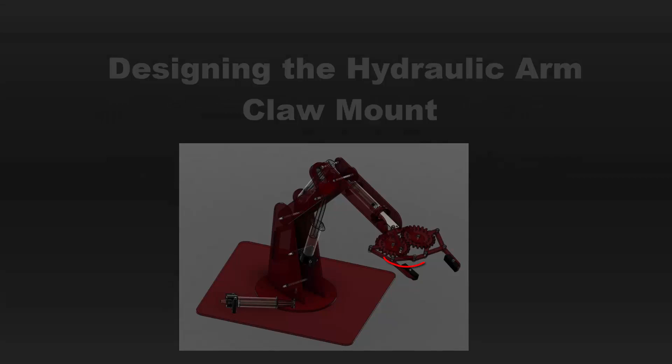Hey everyone, welcome back. In this video tutorial, I'm going to show you how to design the claw mount piece seen right here. This piece is important because it serves as the foundation for all of our other claw pieces. So let's get started.

Come on up to File and let's do a new design. We're going to start a sketch here on our XY plane.

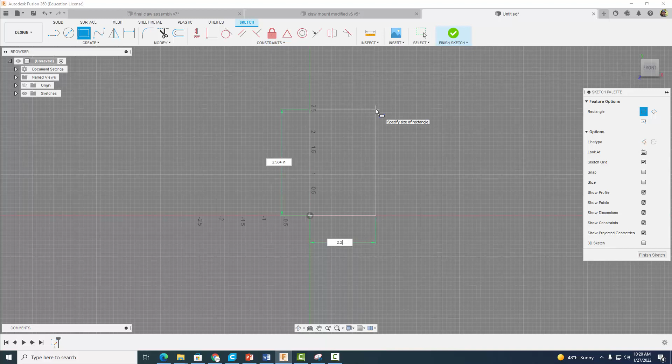The first thing we're going to do is create a rectangle with the following dimensions. We want its width to be 2.25. I'm going to hit the tab button, and we want its height to be 2.819. Enter. Okay, and then we're going to add some chamfers here.

I'm going to modify chamfer, and we want to select equal distance chamfer. I'm going to select right there, and I want that distance to be 0.625. I'll put another one with the same distance, 0.625, then hit enter. So we have our two chamfers looking good.

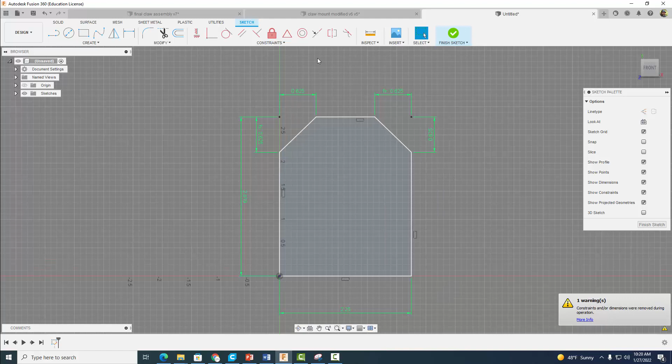The next thing we want to do is come over to our offset tool, and we're going to offset this a distance of minus 0.25 inches. Hit enter.

Now we're going to create two small holes for our M3 bolts, with diameters of 0.11. I'm going to dimension this so it is 0.125 from this edge, and from this edge down here we want it to be 1.189 inches.

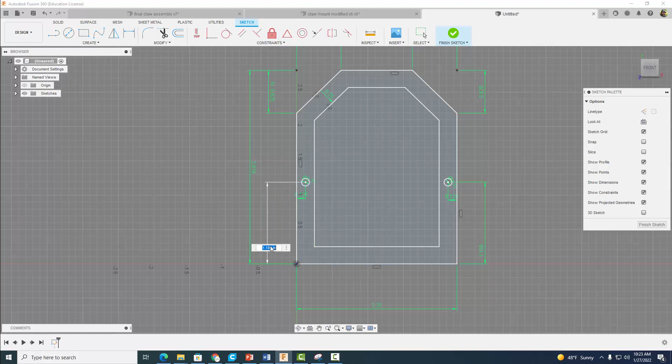I'm going to do basically the same thing for another hole on the opposite side. Grab the circle tool, drag out a circle with 0.11 inches in diameter, and dimension it so it is 0.125 inches from that edge. If we did it right, this should be 1.189 inches there. Yep, we're good.

Now I'm going to grab my circle tool again, go to the center, and drag out another circle with a diameter of 0.9 inches. I'll do that on the other side as well, 0.9 inches. Then I'm going to go ahead and trim some stuff up here.

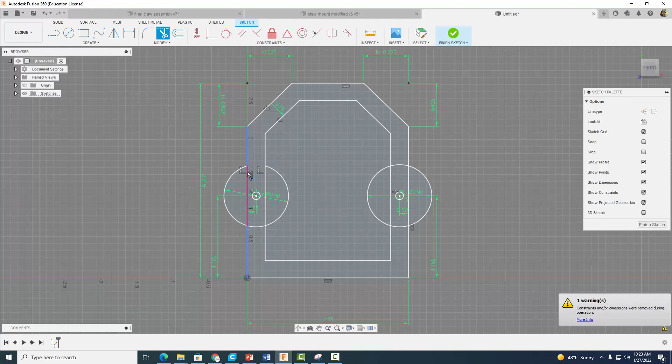Be careful because you can mess this up. I'm going to trim all the inside stuff basically - this guy, this guy, this guy, and this guy. So we have something that looks like that.

Now we've got to create two more holes for two more M3 bolts, and we're going to do them right up here. They're going to be the same diameter, 0.11 inches. I'll make one more over here, 0.11 inches, and then let's dimension them.

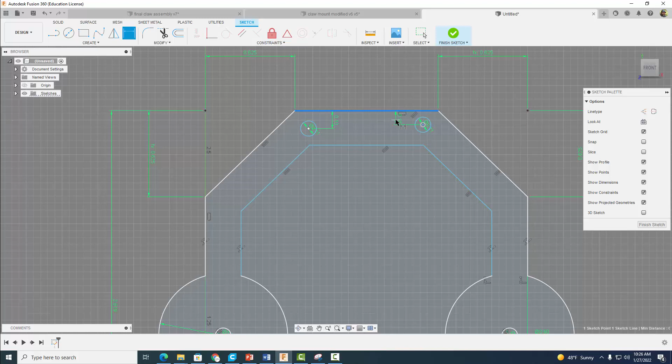From here to here, we want this distance to be 0.13, and from here to here, 0.13 as well. Then from here to here, that edge, we want that distance to be 0.695. Let's do the same thing over here so we're consistent - 0.695. Enter. Looking good, so we have four holes for our M3 bolts.

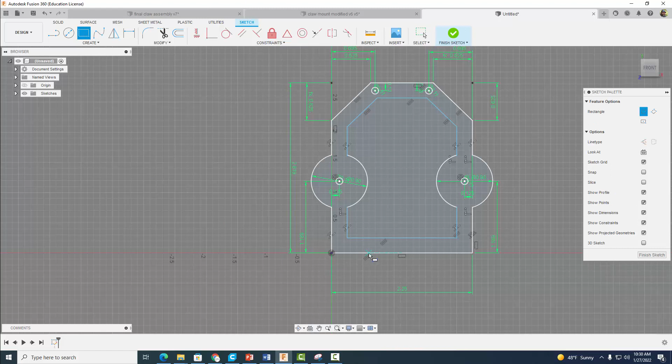Now we're going to drag out a square here, right in this vicinity, and dimension it. From this edge to this edge, we want it to be 0.5 inches. Then we want this distance to be 1 inch, and this distance from here to here to be 1.25 inches.

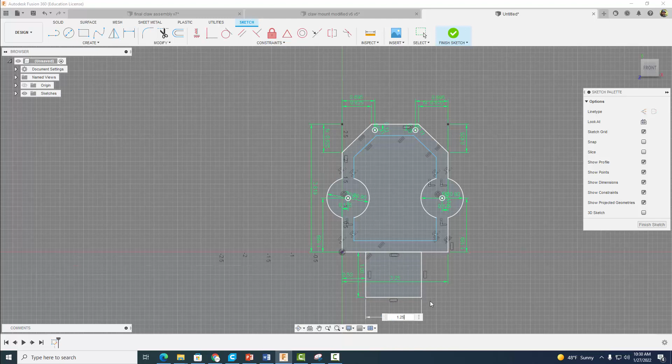I'm going to offset it a distance of 0.2 inches. Then let's zoom in here so you guys can see. We're going to make four squares and dimension them so that each side is 0.125 inches, or 1/8 of an inch.

0.125, enter. So we're going to do that all the way around - a square here, a square here, a square here, and a square there. I'm going to keep going around, 0.125, hit tab, 0.125, enter, another square.

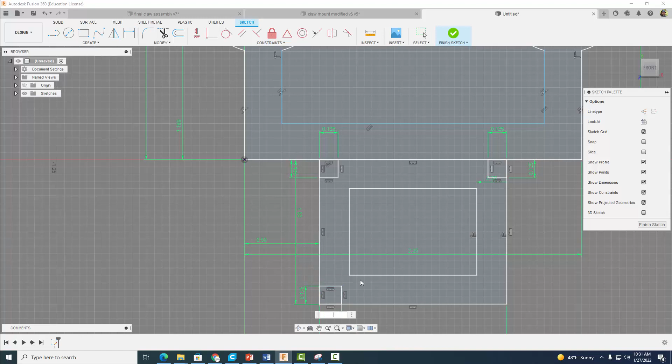0.125, and 0.125. Last one, 0.125, hit the tab button, 0.125. Now we've got to go ahead and trim some stuff up here.

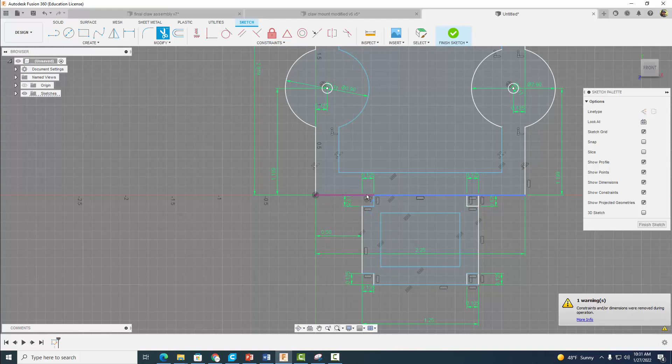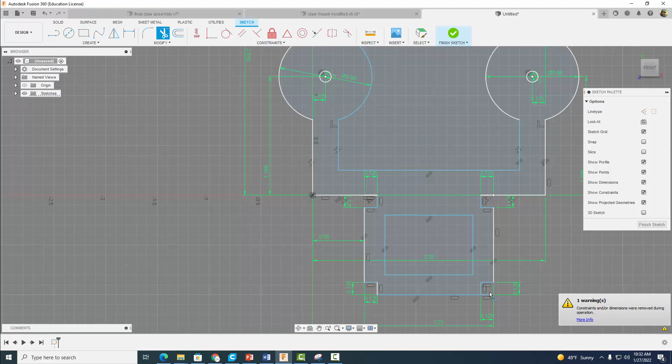We're going to come up to our trim tool and cut out these notches here. Don't want to trim that line - there we go. Want to trim that one though, and that one too. Actually, just this one. There we go, so that's good.

So when we have this, you should have a line that goes from here and connects something like that. Make sure all your lines are connected or you will not be able to extrude - you'll have what's called an open loop.

When you're all done, there's one thing I do want to change - I want to make this line a little bit farther. So we're just going to take that 0.5. That way we have a little bit more structural rigidity in there, and that'll do it.

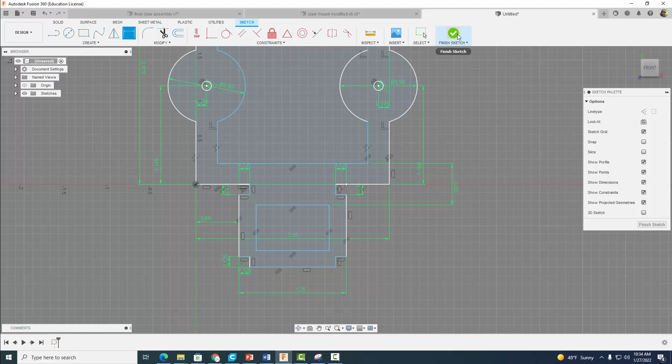For this sketch, let's go ahead and finish it, and now we're going to extrude it a thickness of 0.125 inches, or 1/8 inch thick. Go ahead and select OK.

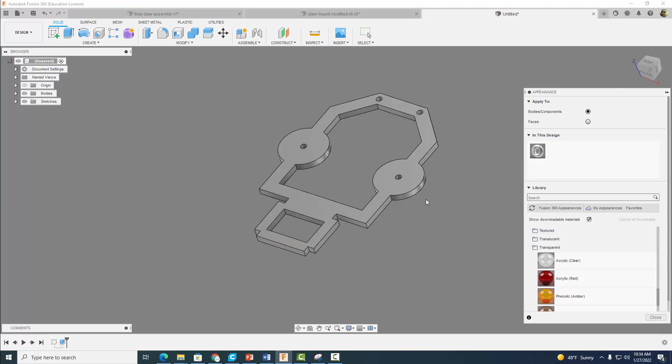As we've done with all our other parts, we're going to give it a material and a color here. Select transparent, come down to acrylic, and drag it over. Now we've made our part transparent acrylic material, which is what we're going to make it out of. Go ahead and hit close.